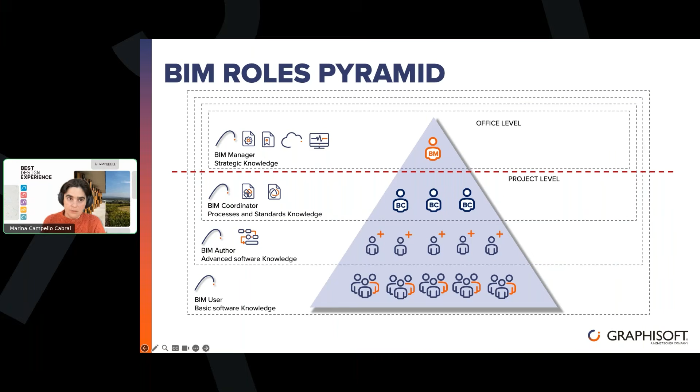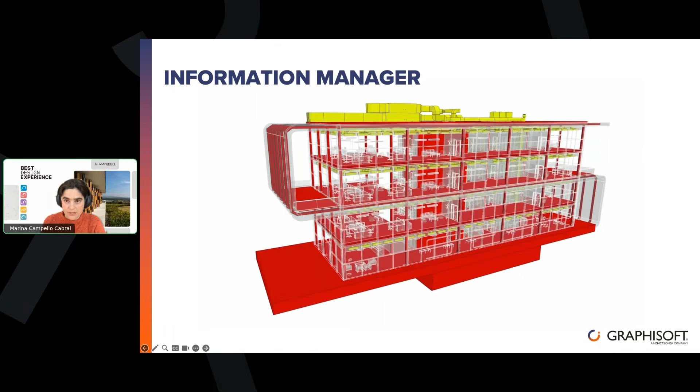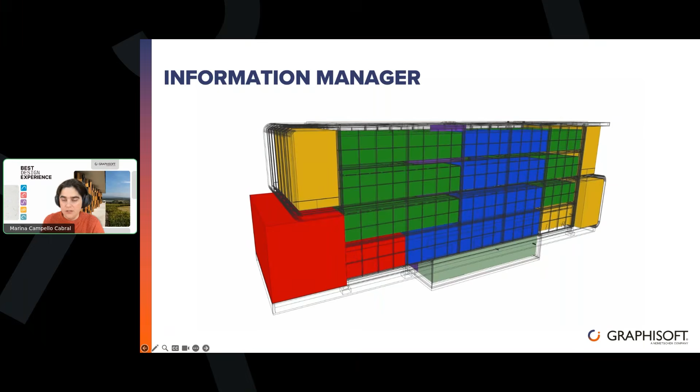I want to draw attention to one more BIM role, the information manager. We're not going to focus on this one, but it's worth mentioning because it was introduced by ISO 19650 as the need for an information management function when working on a BIM-enabled project. This person is responsible for overseeing, federating, and coordinating all project information coming from all different consultants involved in a project - not only the architects, but also the engineers, the service engineers - and making sure the information is accurate, relevant, and complies with the requirements for that specific project.

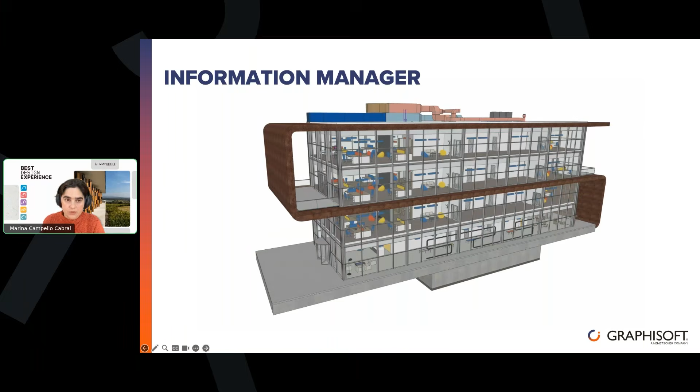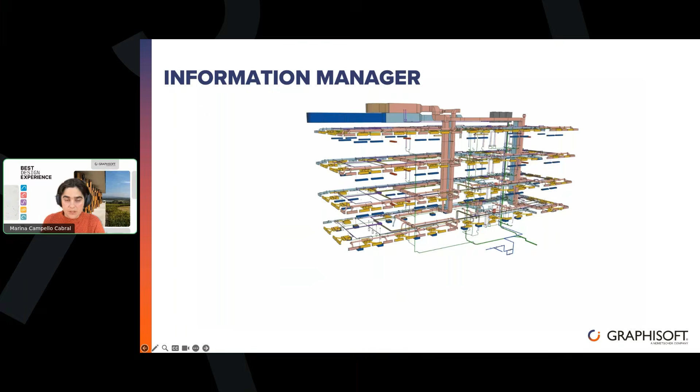Why am I talking about this role? Because sometimes the client can hire a third-party BIM consultant to be responsible for this role, but sometimes the client can ask a BIM manager from one of the consulting teams involved in the project to take over this responsibility. So if you're a BIM manager of an architecture company, likely at some point a client will ask you to also take over the role of the information manager. It's important to mention this.

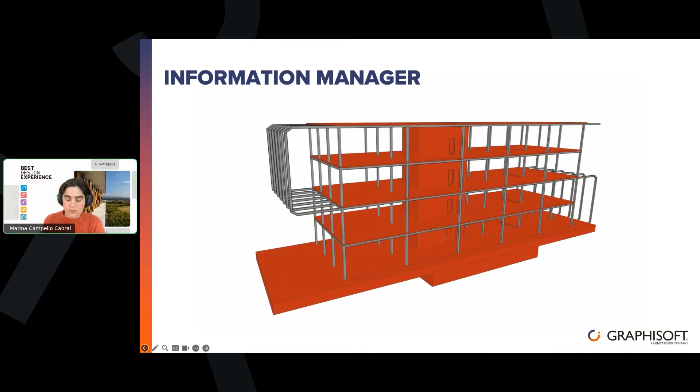Now let's talk about the BIM manager's tasks. Let's dive a little deeper into each of the responsibilities of a BIM manager. If you're considering working as a BIM manager, you will have loads of responsibility, and it will vary a lot depending on the size of the company and the stage they're at in their BIM journey. For instance, you may join a company that's just starting with BIM and need to handle a full BIM implementation, so you'll have loads of tasks on board.

But you might join a firm that already has a BIM strategy and just needs to carry on adapting to new workflows, updating BIM regarding new project types, or because the company is growing. Sometimes you'll find an office with a completely mature strategy, so you just need to do a little improvement or routine maintenance. So depending where your company is on its journey, your responsibility will be different.

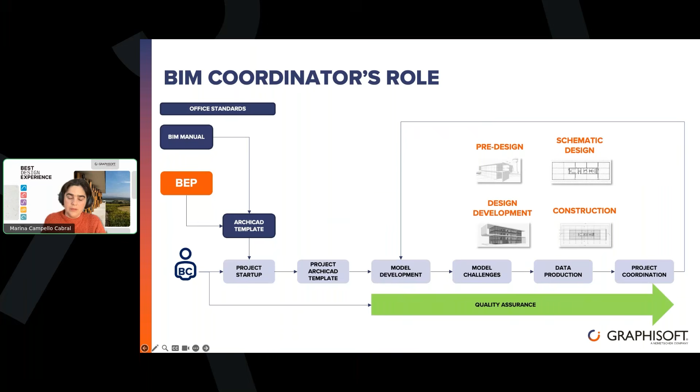And as coordination moves forward, you need to make sure that IFC translators are suitable. You need to handle clash detections when necessary. You need to communicate coordination issues and support your team using platforms like Solibri. And of course, this is not a one-time task during the whole project. These tasks will carry on repeating through the whole project cycle, from pre-design up to construction.

As we mentioned before, the BIM manager is at the strategic level, while the BIM coordinator is on the project development level. Just to draw a parallel, the BIM manager defines standards, practices and systems, while the BIM coordinator will need to enforce these standards at the project level.

While the BIM manager is creating the ARCHICAD office template and managing it, the BIM coordinator will look at this ARCHICAD office template, incorporate any specific requirements for that project, and create the project template.

While the BIM manager is developing the BIM execution plan and the BIM manual, the BIM coordinator needs to define and choose the best strategy for the project.

While the BIM manager is training the whole office, the BIM coordinator is giving support to the project team on modeling challenges. And while the BIM manager is overviewing the project, the BIM coordinator is looking at data production, quality assurance, and coordination, being involved on a daily basis with that.